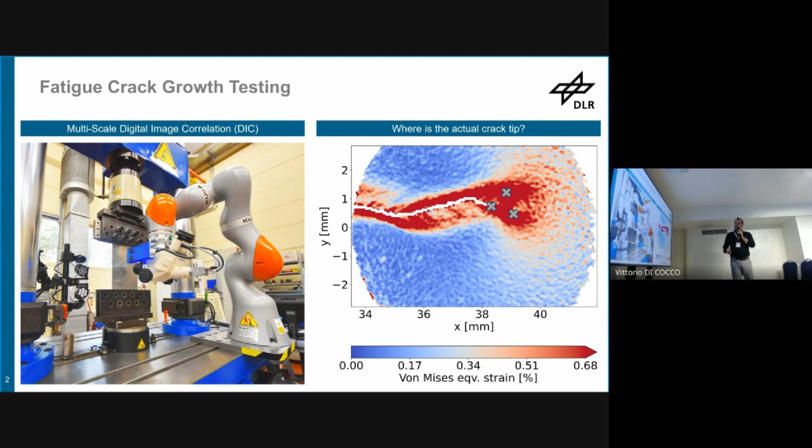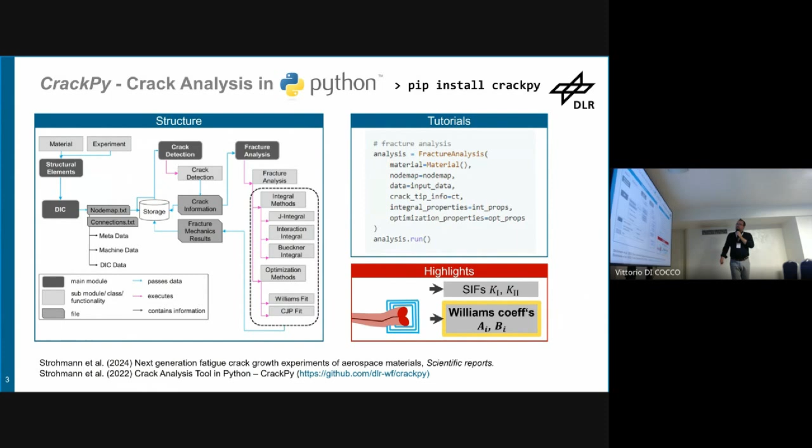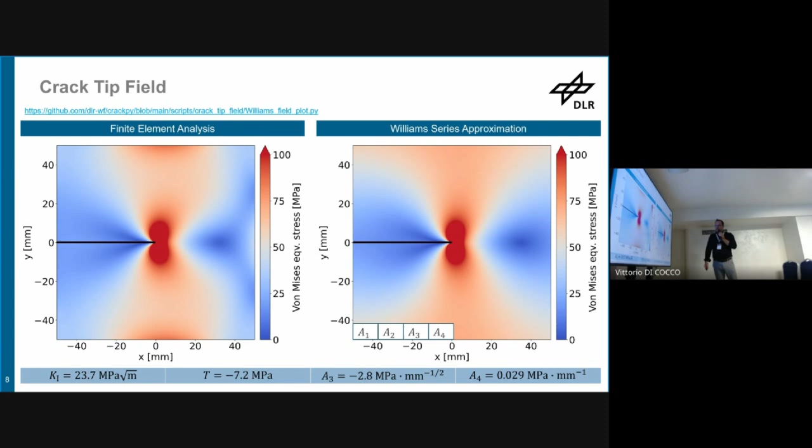All right, so let's go back to the original problem setup. We want to find a good crack detection algorithm, and we want to start from an estimate of the crack tip position and then find a correction to arrive at the real corrected position. So this is the setup. And our assumption, if you want, is that we expect there to be a formula, a function f, that takes the Williams coefficients and gives me this correction.

Why do we think this is the case? There is previous work by Réthoré, this one from 2015, where he derived this formula here. A minus 1 is the first negative coefficient of the Williams series. A1 is the one that we know. And if you apply this formula iteratively for the x correction, you arrive at the corrected position.

The problem is the derivation is only valid under mode 1 conditions, and you don't have a y correction. So you just have this correction parallel to the crack path. And in real DIC data, we don't really know whether we are parallel or we have an offset. So this is why we wanted to find this more general formula.

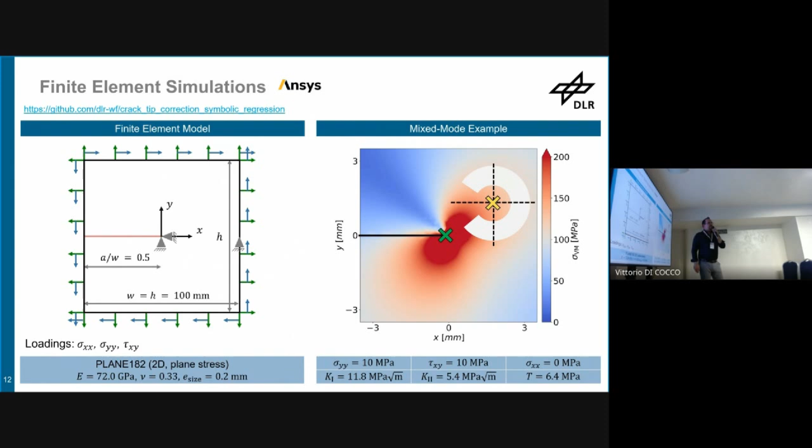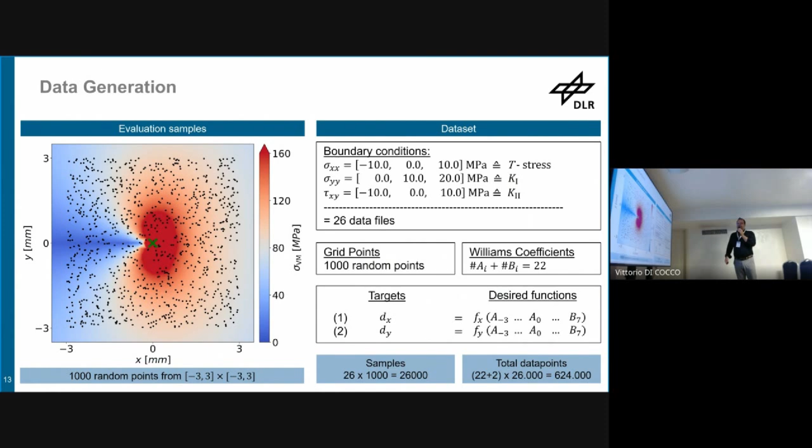And we can fit the Williams series and calculate the Williams series coefficients at that point. Now, the only thing we need to do is select randomly a couple of points. In this case, for each simulation, for each boundary condition, we selected 1,000 points randomly and set up a data set where we match the Williams coefficients with the correction vector. And then we started the Φ-SO model, the symbolic regression model.

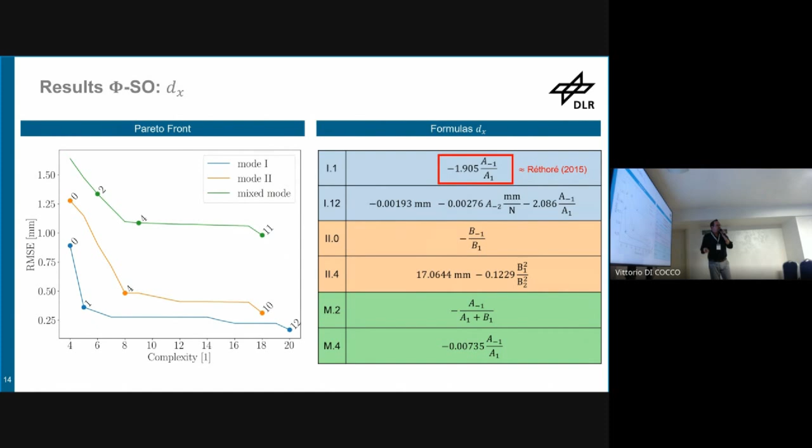For mode 2, we get a very similar formula. We basically just replace the A's by B's, so that was reassuring. And we even get one for mixed mode, training with all the data points. But the fit is not quite good, the error is quite high, so it doesn't really work for all cases. For the Y correction that we wanted, this is the generalization. We have a very similar formula. This is also newly discovered, and for mode 1 also very similar. Probably one could have guessed this, but we didn't.

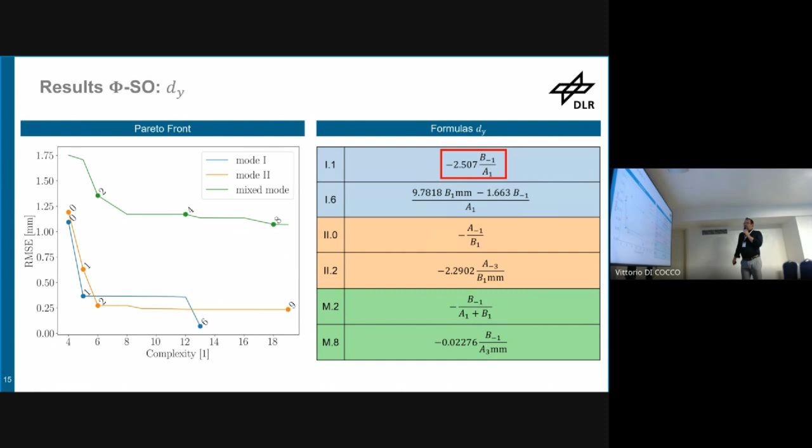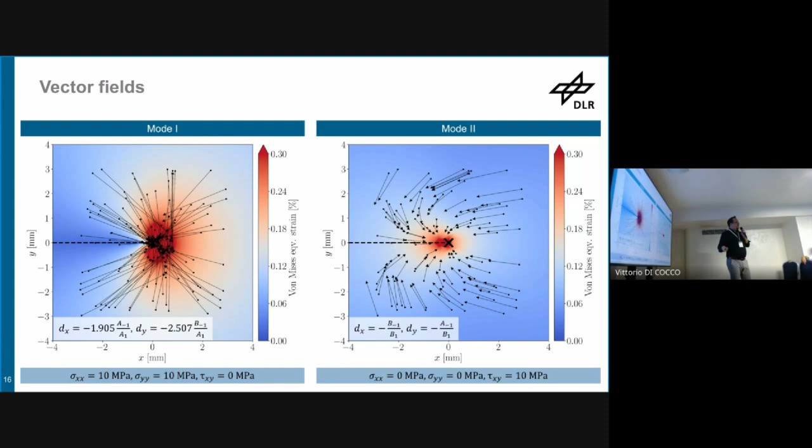Okay, so what do the results look like? With the formula that I highlighted, I plot here for one example the correction vectors, and they point towards the corrected position. And even for mode 2, the other one that we found here, you have a very nice convergent behavior. So we expect that we can iterate these formulas, and then we arrive at the corrected position. And this worked like a charm. For these formulas, you need about 5 iterations to arrive at the correct position. So we're happy, right?

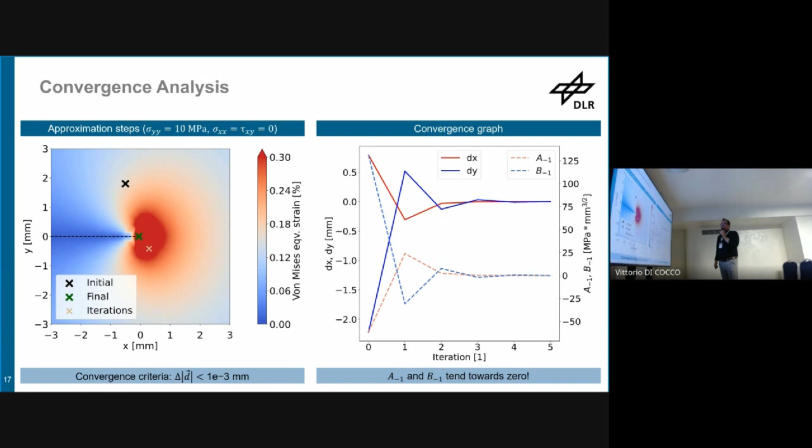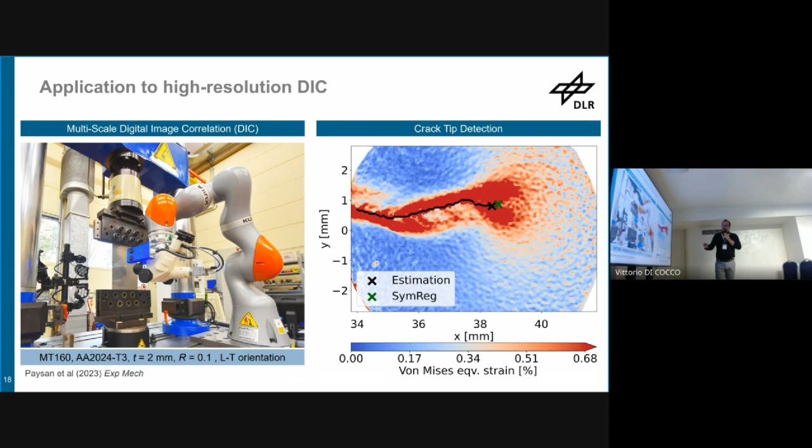In this case, as a starting point, we use the line intercept method, which is also part of CrackPy, but you can use any other method. If you have some other special method that you like, you can just put this correction on top. And if you're close enough, it might work. There's another issue, maybe I say that at the end. So let's summarize first, and then I do the conclusion.

What we did is we had this idea to come up with a formula that corrects, to find the correct position iteratively. The approach is as follows. We started with ANSYS, with the FE simulations, used CrackPy to determine the Williams coefficients. Then we created a huge data set out of this. In this data set, you can use the method of your choice to search for correlations, knowledge. In this case, we used deep symbolic regression.

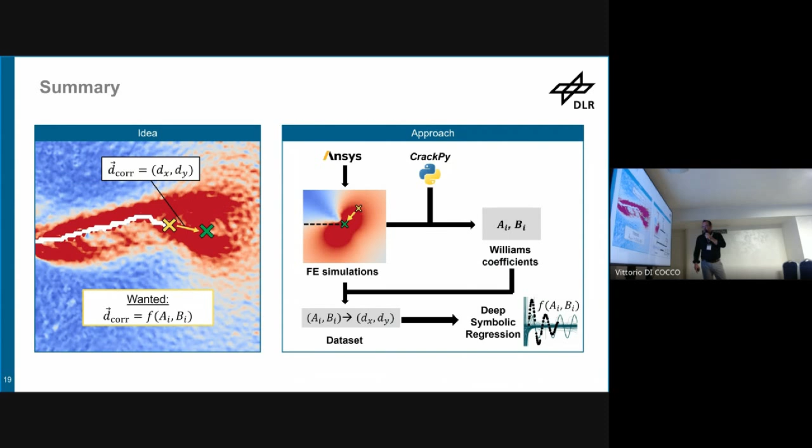So to sum up, we have this correction formula, which is based on Williams coefficients. We trained just with FE simulations and developed with CrackPy. PySR, just to say this again, we really like this method, and it might be something you could use yourself if you think there is hidden knowledge in the data that you have, to search for correlations. We will for sure do this because, as Eric was saying, we have hundreds of gigabytes of data. It will be a fun experience for one of our PhD students. It's a very cool method. That case worked quite well, and I'm happy with it.

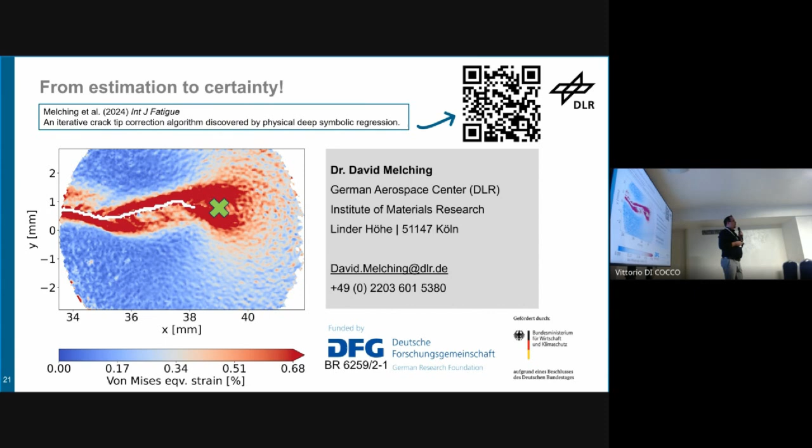We published this recently in the International Journal of Fatigue, if you want to check it. Otherwise, just approach us if you are interested in the method or in physical symbolic regression. In general, we are open for collaborations and talks.